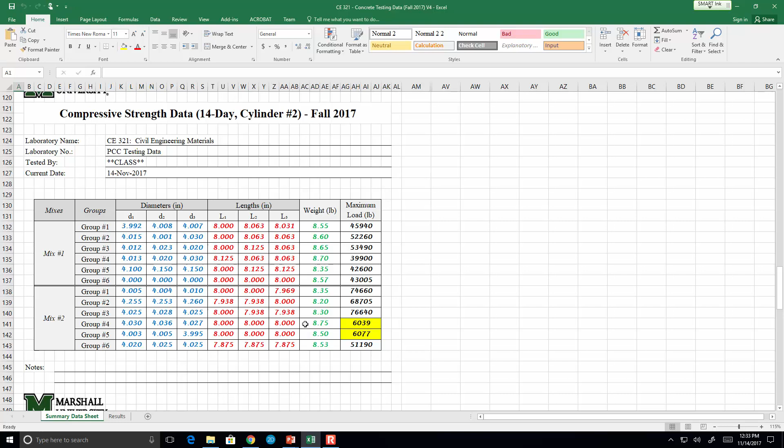This is the Excel sheet, and if we look here on 14-day mix 2, I don't think those are right. We checked it. We checked it, I think that's right. All right, group 4, was it 6039? Hold on, probably. Do you have your data sheets, group 4? There's enough of you in here that one of you should have your data sheets. This is 14-day, mix 2, cylinder number 2. So this is 6077, and this is 6039. Okay, all right.

No, I know he did. I wasn't testing him, I was testing everybody else who said, 'Oh yeah, we checked it, we checked it.' I know he checked it. I was calling everybody else out on it, that's what I was doing. So I at least got groups 4 and 5.

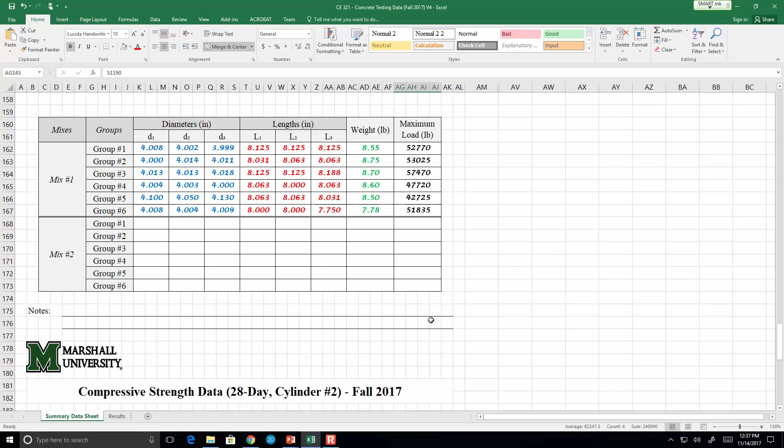And you all know, the big thing to pay attention to is that rubric. There's a rubric posted online, and that's literally how I'm going to grade the report. So you need to be paying attention to that rubric and ensure all of the information it's asking for is included. I'll pull it up to make sure everybody's on the same page.

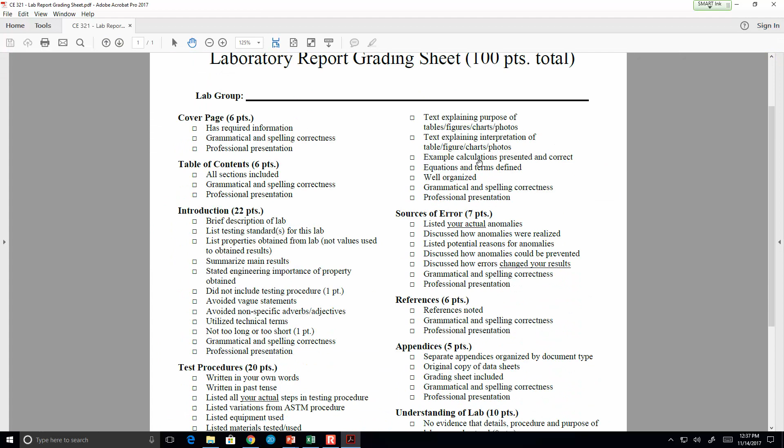So this is the rubric, and this is what I'm going to do. Cover page, 6 points. Table of contents, 6 points. Introduction, test procedures, conclusion, sources of error.

Oh goodness, go away. Yeah, we haven't had the Java pop-up yet. Give it time, it will.

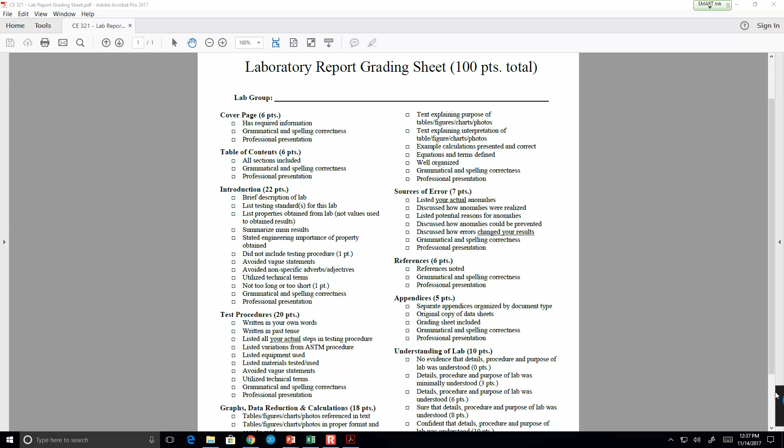Graph. I love this computer. Graphs, data reduction and calculation, sources of error, references, appendices, the understanding of the lab.

This isn't a section of the report, by the way. This is me evaluating whether or not you understood the lab. I know there's going to be one group that says understanding of lab, it's like no, that's not what that is. So yeah, this one is me giving my assessment of your lab report. That's what this is.

So make sure you're following this. All right, any questions? Okay, so let's go into lecture.

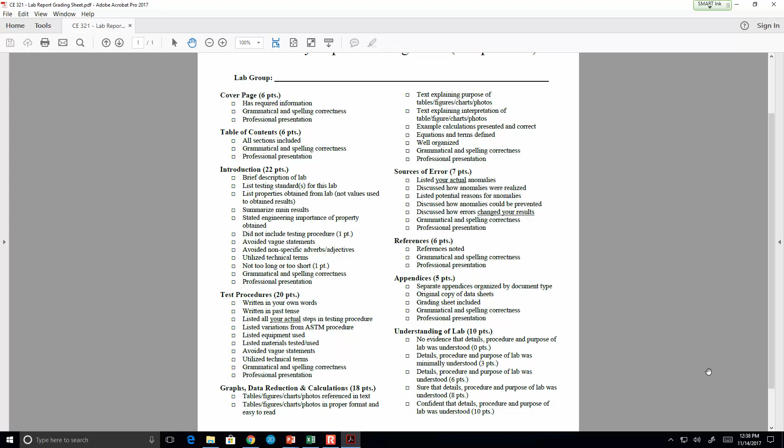I've got 2 real topics I want to talk about today: aluminum and timber. Aluminum is going to be real quick, there's really not a lot to say. The notes and everything are posted, I got those posted today. I usually like to post them a little earlier, but I've had a busy week. But there's really not a lot to say about aluminum, and here's why.

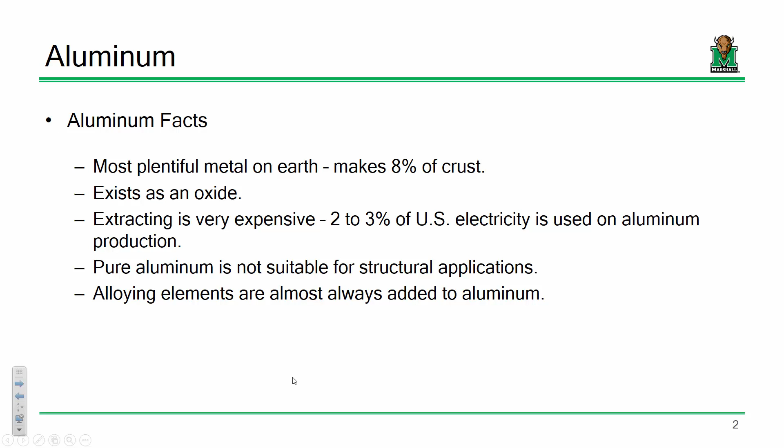Everybody here knows how abundant aluminum is on the planet, and it's used for quite a lot of engineering applications. But one of the things you'll find is that it's not used very much for many civil engineering applications. You don't really see very many aluminum bridges or aluminum building frames. You see aluminum Coke cans and aluminum products used in mechanical engineering in cars and planes, but you really don't see it much in civil engineering. There's a very specific reason why, but we'll get into that.

First off, it's expensive in comparison to other materials. It also has some very interesting aspects: first off, lower strength. If you just look at yield strength and tensile strength of aluminum and compare that against regular mild carbon steel, it doesn't hold a candle to it. Also, in terms of ductility, steel has a much higher ability to withstand permanent deformations than aluminum does.

One other aspect of this is the coefficient of thermal expansion. We'll bring up a little mechanics of deformable bodies for you all that love that class so much. When we apply mechanical stresses to a system, it responds by deforming. I take an element, physically yank on it, and it will deform. What is another easy way I can cause deformation on a given system? I can heat it up or cool it down, right? When things heat up, they tend to expand; when things cool down, they tend to contract. In solid mechanics, we relate that through a coefficient of thermal expansion.

Each material has its own Young's modulus and its own Poisson's ratio, and the coefficient of thermal expansion is another intrinsic property unique to a given material. For instance, if you want to determine the change in length of a bar that's been heated up some amount, you take the length of that bar, multiply it by the change in temperature, and then multiply that by your coefficient of thermal expansion, alpha. I know you saw that in deformables. So alpha is a property unique to a given material - the alpha value for steel is different than for aluminum or for brass. Aluminum has a coefficient of thermal expansion that's about twice that of steel.

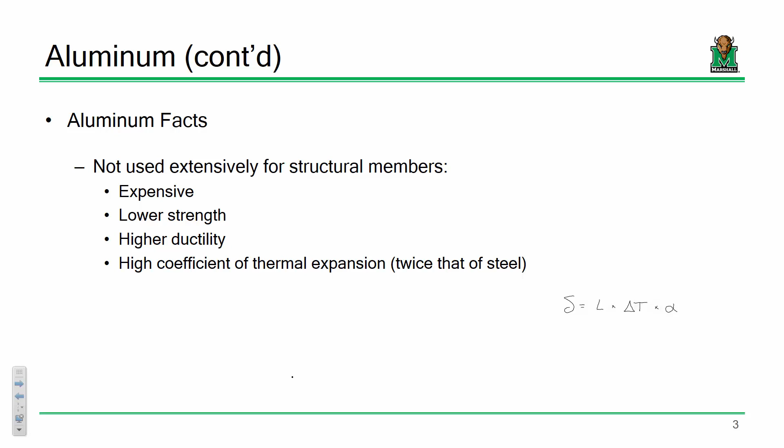If you take a piece of steel and sit it outside, you're going to get twice as much strain essentially in the aluminum that you will in the steel under the same thermal conditions. That's a big deal since a lot of our civil engineering structures are outside. So that's one reason why we really don't use aluminum that much.

But we do use it a lot for other industries. You'll use it for containers and packaging, Coke cans, and what have you. You do use it for aspects in engineering that aren't very load-bearing, like architectural aspects - doors, windows, and siding. Nothing wrong with that being aluminum because they're not really experiencing a significant force effect. That's no big deal. Sometimes they're used as electrical conductors, and you also see it used quite heavily in aircraft, vehicles, and things like that.

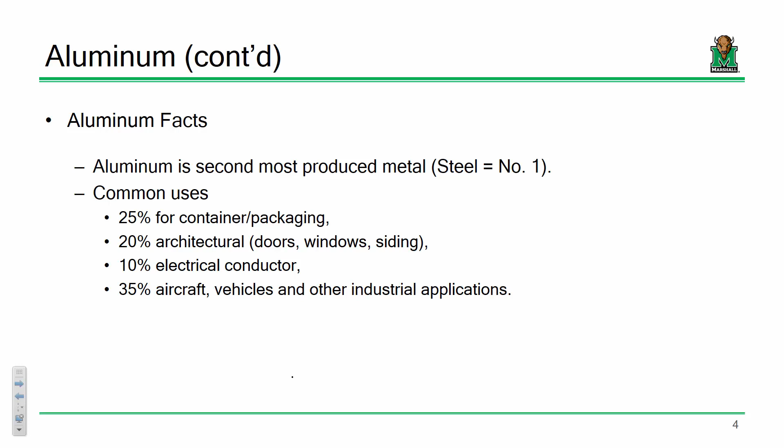Now, it does have some advantages. It's light, it has a good strength-to-weight ratio - you got to give it that. It's got good properties, good weldability properties. It doesn't really rust. There's a little bit of corrosion that can happen with aluminum, but not to the degree that you get with steel. So that's kind of nice. It works well for cast products as well because of its melting point. It's a little easy to deal with.

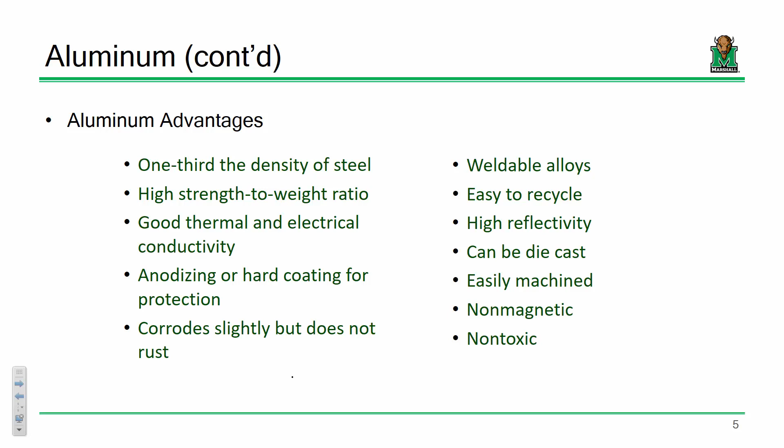Its disadvantage, the big one, is its modulus of elasticity. It is about 1/3 that of steel. So if I take a steel product and an aluminum product, exact same dimensions, exact same properties, except one's made of steel and one's made of aluminum, and I apply a tensile load to it - say I take a steel bar and an aluminum bar and yank on it, assuming they have the same dimensions and the same forces - the aluminum bar's deformation will be 3 times that of the steel. That's a big deal in the world of engineering.

Take highway bridges, for instance. One big controlling aspect of a highway bridge design is limits on its deflections. A common limit in highway bridge design is L/800. So if I take the length of a bridge - let's say I have a 100-foot bridge, simply supported - take 100, divide it by 800, and then multiply it by 12 because I want my answer in inches.

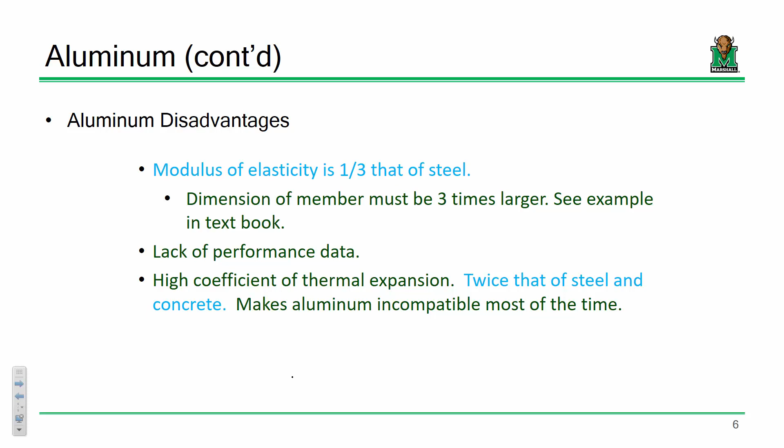Under live load - and by live load I mean the vehicles, the HL93 AASHTO design truck, you folks in structural analysis should know what I'm talking about - under that vehicular load, a 100-foot bridge in the United States cannot deflect more than 1.5 inches. So a material's ability to withstand those deformations is really important. It's one of the reasons why aluminum doesn't really work that well. If you look at tensile properties, if you compute the slope of that linear portion, it's going to be about 1/3 of that of steel. The modulus of elasticity is about 10 million psi for aluminum. What's the modulus of elasticity for steel? Well, 29,000 ksi - 29 million psi. Okay, so that's where we're getting the 3 times that.

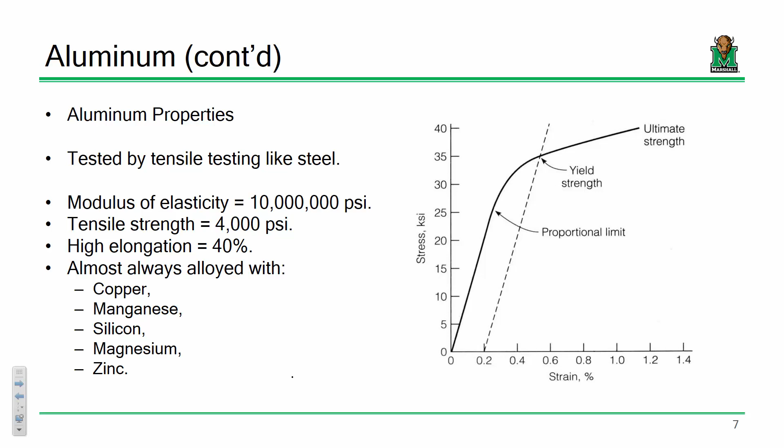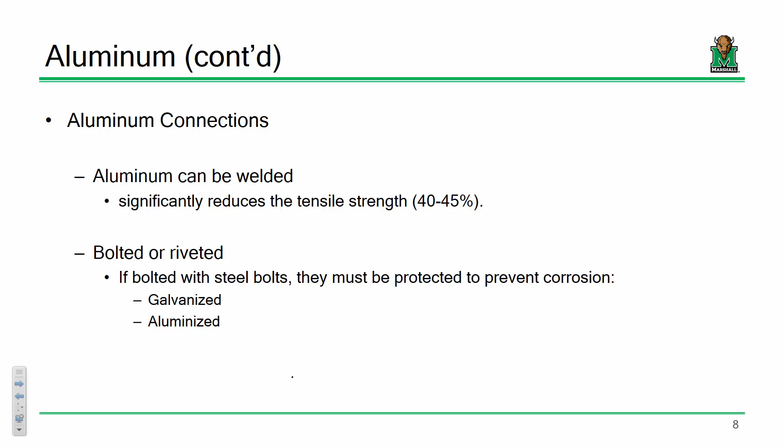Tensile strength, we're looking pretty low. A couple other things with aluminum - because it tends to be used for aircraft type products and things like that, aluminum can be bolted together, but you tend to see more riveting applications with aluminum than you would with steel. You have to protect those elements against corrosion, so sometimes you have to galvanize them or aluminize them or what have you, just to ensure that you don't get significant corrosion.

Speaking of corrosion, aluminum kind of corrodes - it develops a thin oxidation layer on the outside, and that's about it. It's kind of like an oxide film, and it actually serves as a protection barrier for the rest of the product. Certainly, regular old structural steel doesn't behave that way. Weathering steel kind of does, because the chemistry of that heat of steel is actually designed in order to behave that way.

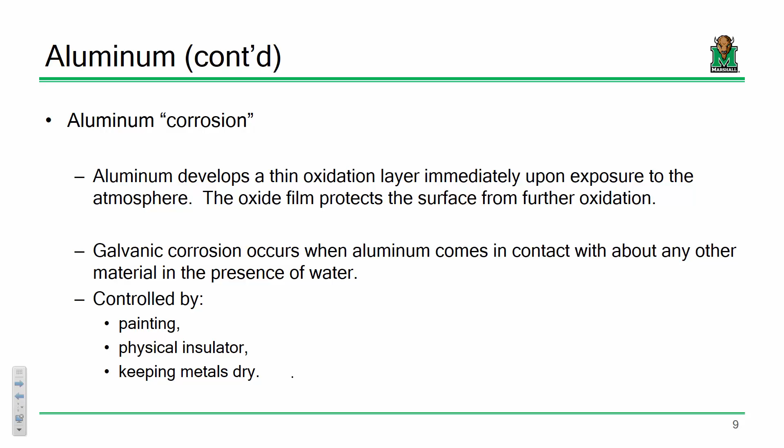One big issue, though, is if you have a significant presence of water, you can get a little bit more corrosion. That means painting it, keeping it dry, providing some sort of insulator, et cetera. That's really all I have on aluminum, because, again, we don't really use it much in civil engineering applications.

Yes? You see aluminum products riveted, especially in the aircraft industry - you see aluminum products riveted a lot more.

It's just an industry standard for - keep in mind, I'm not talking about civil engineering applications. I'm talking about aircrafts and vehicles and things like that. That's a mechanical engineer's world. Remember, mechanical engineers design weapons, we design targets, so. Did you like that? Yes.

Okay, this is recording. I'm glad you whispered that. It doesn't need to have my name associated with it. Next thing you know, I'm going to get a knock on my door, like, we got some questions for you.

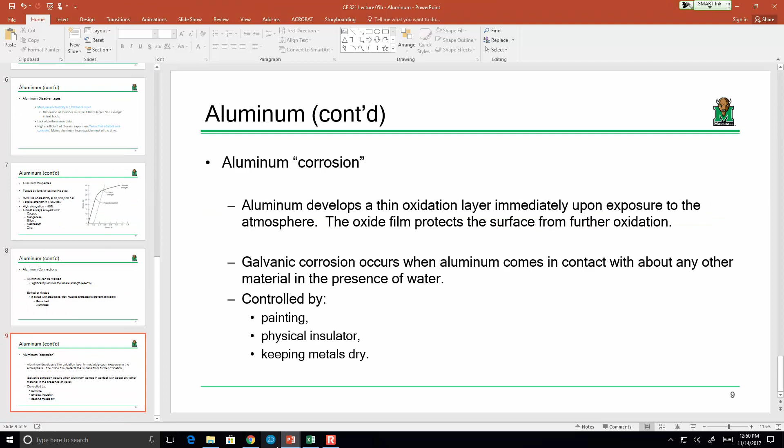Okay, so let's talk a little bit about timber and wood. I'm using a little bit of an older set of notes just because I did not have time to do a little bit of reformatting on this, but it doesn't matter, these are great notes. So let's talk a little bit about wood, let's talk a little bit about timber.

Wood is the earliest construction material we ever used, right? Historically, I mean, the first construction project in history: have a river, there's a tree, knock the tree down, it goes over the river, you have a bridge. First construction project ever. I'm just going to design all my bridges that way.

What's that? A what? You know that if you go to MIT, the mascot is the beaver, because they're nature's engineer? I'm serious, I'm not making that up. Hey, I went to Bluefield High School, you know who the mascot for Bluefield High School was? The Beavers. So I take exception to that, thank you. What's that? I said, did you all have a lot of engineering at your high school too? No. It's not as clever then. No, it's not, not even close. I totally agree with you.

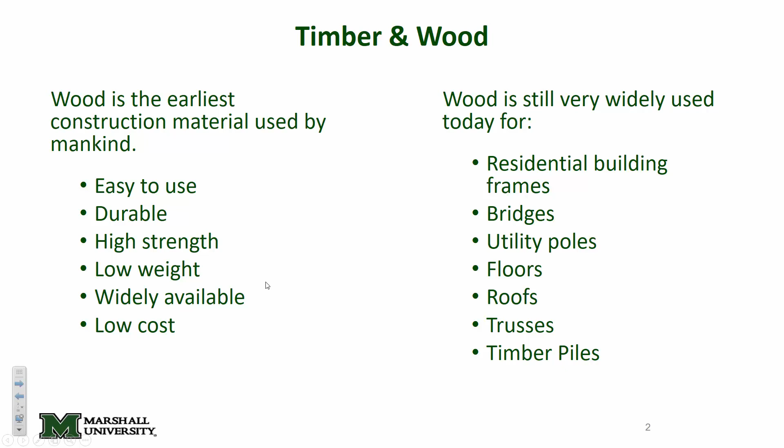Now, wood is obviously used a whole lot in the residential market, right? 2x4s comprise the primary construction material we use in residential construction. 2x4s, 16 inches on center, that frames up your walls that will ultimately frame up your house. So an understanding of how wood behaves and how timber products are produced, and the different timber products out there, is worth discussing.

Now let's talk a little bit, let's just go back to basics. It might feel a little bit like we're in 7th grade when we're talking about some of this. So some of these terms you might be familiar with, some not. How many of you have heard the difference between a deciduous tree and a coniferous tree? Anybody know what I mean? So help me out, what's the difference? There we go.

Deciduous trees lose their leaves. Coniferous trees are pine trees, evergreens that essentially don't lose their leaves. They retain their color throughout the year.

How many of you have heard of the terms endogenous versus exogenous when it comes to trees? In most engineering applications we use exogenous trees, and that's talking about the way trees grow. Up until now, how did you think trees grow? Annually, forming rings, right? That's what an exogenous tree essentially means. That's what most trees are, and those are the trees we use for most engineering applications. They grow on an annual basis, they form annual rings, and they grow from the inside out.

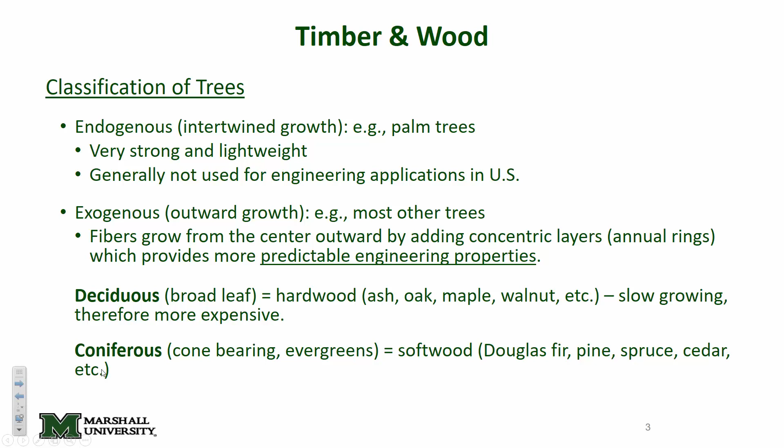Endogenous trees don't really grow like that. The fibers don't grow in an outward direction as much as they kind of intertwine and develop along the tree. You get very strong and lightweight properties, but they're a little variable and don't work very well for engineering applications. A good example of an endogenous tree is a palm tree. Palm trees really don't grow like that, they kind of do this whole thing - I can't really demonstrate it.

Let's talk a little bit about the structure of wood. I'm sure everybody knows you can determine the age of a tree. If you have it sawn, if you're looking at the stump, you can count the age of the tree by counting the number of rings. So if it's got 57 rings, it's a 57-year-old tree.

Just so everybody's aware, what comprises a ring - if you look at the rings of a tree, you see light regions and dark regions. It's not as if that's really different wood per se, but it's more of a density difference in the individual cells of your wood. If you look at your rings, you have a lighter grained wood and a darker grained wood. Those darker grains correspond to the denser regions of thick-walled cells within your tree.

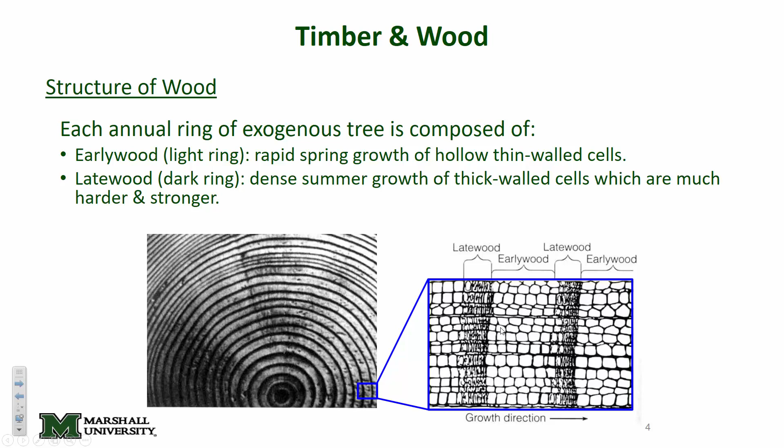Early wood is your rapid growth right after winter. As soon as winter ends and you get into spring, you get a sudden bloom of growth. Once you get into summer and it starts to get warmer and then cool down, that growth tends to slow down, and then you develop late wood. In those slower growth periods, the growth occurs over a denser region, which is why you have a denser collection of cells.

Some structural features of trees so you understand a little about the anatomy of a tree - I'm starting at the center and working my way outwards. I have a feeling probably in middle school or high school you learned these terms before, like how many have heard of the pith of a tree, the center core of a tree? A lot of you have probably seen this before.

The heartwood is right outside where the pith is, and then you get your sapwood. The sapwood is really what transmits the sap throughout the remainder of the tree. You have a very thin cambium layer, which is really where all your wood growth occurs - it grows from the outside, so the cambium is where the wood is growing. Then you get into your bark, your inner and outer bark. Your outer bark is essentially that dead, corky type layer that exists on the outside and insulates the rest of the tree.

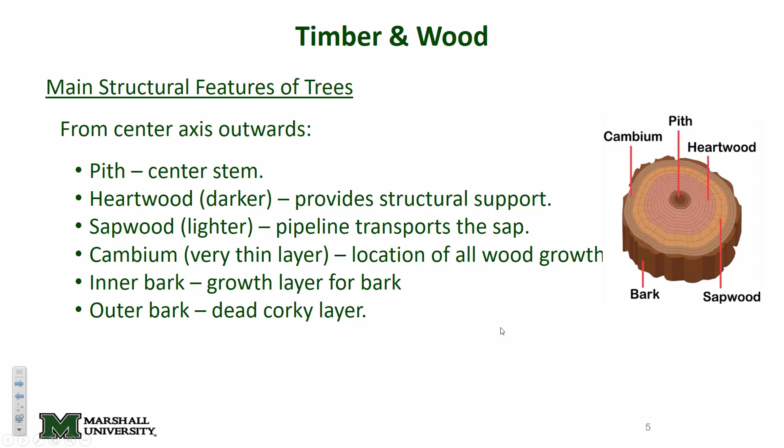Now I'm going to throw some words at you - some words I'm pretty sure you haven't heard before. How many of you have heard of the term isotropic? Now how many of you know what that term means as it relates to engineering or engineering materials?

Let me explain. Let's say I have a little cube of steel, 3 inches by 3 inches by 3 inches. And I take that cube of steel and I press on it, so I'm putting it in compression. Steel tends to behave very isotropically.

We tend to assume that steel is an isotropic material. The reason why is it really doesn't matter if that cube is faced this way, this way, or this way. Steel, from a material standpoint, the properties really don't change with the orientation of my load. Does that make sense?

Now, don't get me wrong. I don't want you to confuse that with just general structural behavior. For instance, if I have a W10 by 49, which weighs how many pounds per foot? How deep is a W10 by 49?

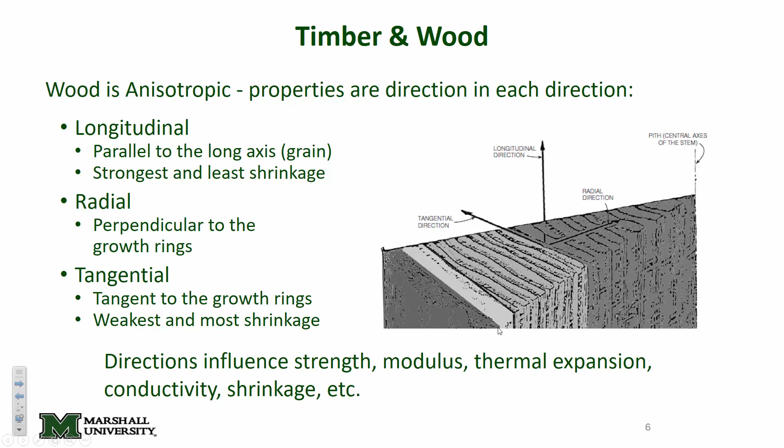Okay, let's move on. One of the things that really affects wood properties... no, I mean seriously, oh that's a good question. Oh yeah, no that's a good question. I was like, well wait, where have you been? No, I'll say this.

Concrete is a material that behaves very differently in compression than it does in tension, and we understand that. However, if I have a cube of concrete and I load it this way versus turning it and loading it this way, or turning it and loading it this way, honestly its behavior really isn't going to be that much different. Now, let me also say this - here's one big difference between characterizing a material like steel and characterizing a material like concrete.

Steel we can tend to assume is a very homogeneous mixture. What I mean by that is steel's consistency, for the most part, tends to be the same throughout its cross section. So if I had a cube of steel, it's basically the same properties here as it is here, as it is here, as it is here, etc.

Concrete is a very heterogeneous material. In other words, it's a mixture of gravel, sand, cement, and water, so its properties are highly variable. Concrete properties here might be different than they are here. You've all even seen that in the lab, right? If you didn't properly rod it or tamp it, give it the old tap on the side, just tap it in - if you didn't do that, you can create a weak spot.

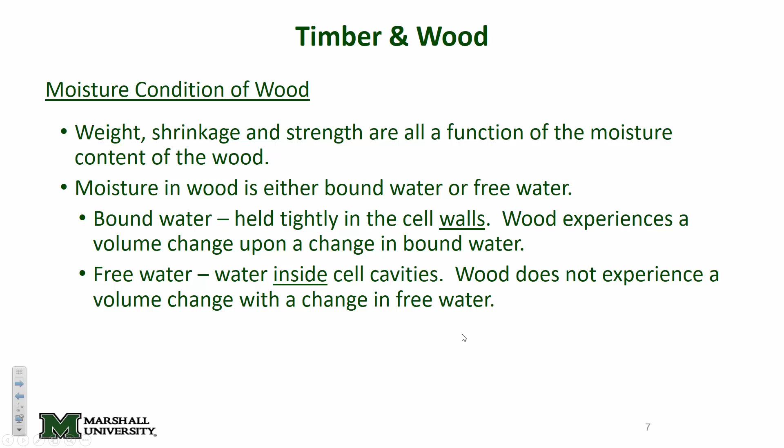So if you want to think of it like this, imagine a piece of wood as a whole bunch of really, really tiny balloons. Bound water is water inside the balloon, and free water is what's on the outside. Water inside the balloon is going to cause it to expand. Water on the outside really isn't going to do anything, just make it heavier. Make sense?

So just so you're aware, what is the fiber saturation point? The fiber saturation point is a lot like absorption associated with aggregates. Let's remember, what was absorption associated with aggregates? Who remembers that? Absorption was the moisture content at what state? Saturated surface dry. Now, what is saturated surface dry? Dry to the touch - the pores are full, but the surface is dry, right? So that's what saturated surface dry is, and that's kind of what's going on with the fiber saturation point.

That's a specific moisture condition associated with a piece of wood. The idea is that the cells are completely saturated with bound water, but there's really no free water inside the cell cavities. And that varies from a given species of wood to another species of wood.

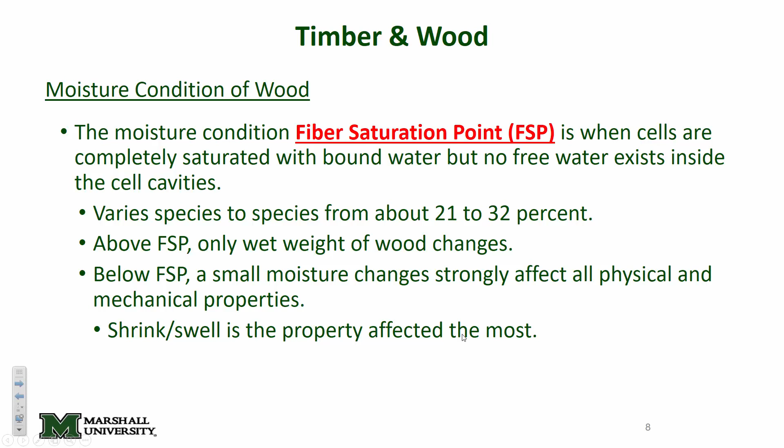So whether you're dealing with Georgia pine or Douglas fir, something around 21% to 32% is the fiber saturation point. When you get above that point, all that's changing is really the weight of the wood, you're just adding water that makes it heavier. Below the fiber saturation point, we're talking about change in moisture content, and that means shrinking or swelling of the wood, which really tends to change mechanical properties.

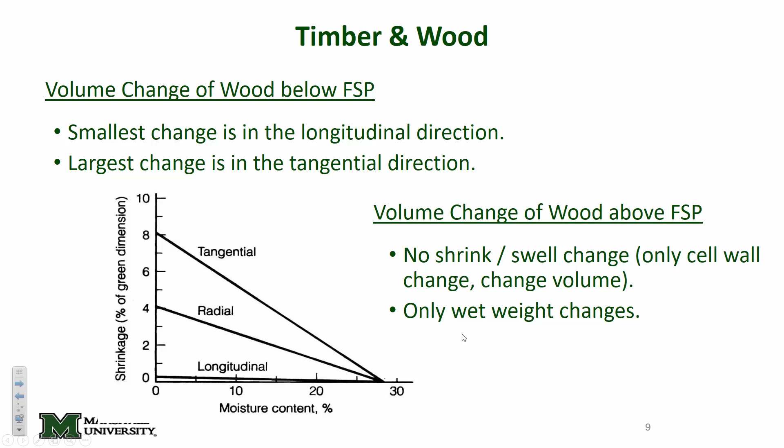As your moisture content goes up, your shrinkage can change as well. One other thing to mention: when moisture content changes below the fiber saturation point, the volume changes, but the smallest change is in the longitudinal direction and the largest change is in the tangential direction. So the wood isn't getting longer as much as it's getting wider. That's what's happening inside a piece of wood when moisture content changes, below the fiber saturation point.

Another moisture content measure that is very important for engineering applications is equilibrium moisture content. That's basically what's happening when the moisture content inside the wood matches the ambient moisture content according to atmospheric conditions in a given region. So given the moisture content in our average atmospheric conditions, EMC is when the moisture content reaches equilibrium with naturally occurring conditions in the area. It depends on humidity and temperature.

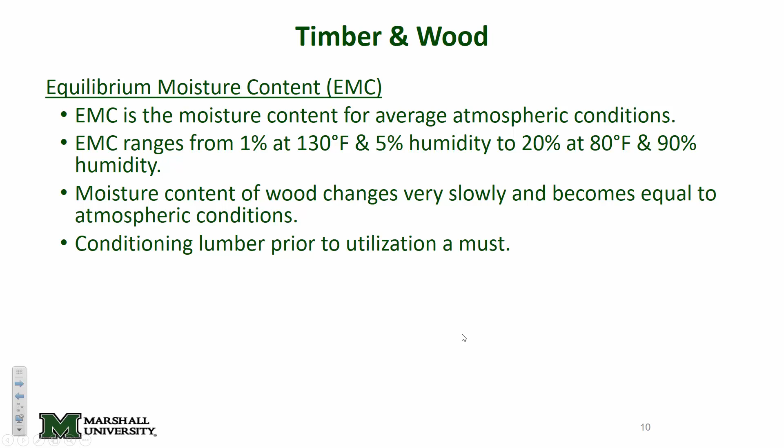One thing about moisture content of wood is that it does change, but very slowly. Ultimately, over time it ends up matching local conditions and reaching EMC. You kind of have to condition lumber prior to utilization. We'll talk about some of this throughout the lecture, and we'll talk about production of lumber pretty soon.

Okay, so let's talk about some engineering applications of wood, different products. I assume everybody has heard of a 2x4. What are the dimensions of a 2x4? So somebody knows that a 2x4 is not actually 2 inches by 4 inches. Those are nominal dimensions - we plane that 2x4 a little bit in order to achieve those exact dimensions.

Dimensional lumber is defined as anything between 2 inches and 5 inches thick, so 2x4s, 2x6s, 2x12s, 4x4s, etc. That's used for light framing, and it owns the world in residential construction - you see those all over the place. Heavy timber are 6x6s, 8x8s, etc., and those are usually pretty rough, so when you see a 6x6, it really is 6x6, or an 8x8 really is an 8x8. You'll see those for heavy framing.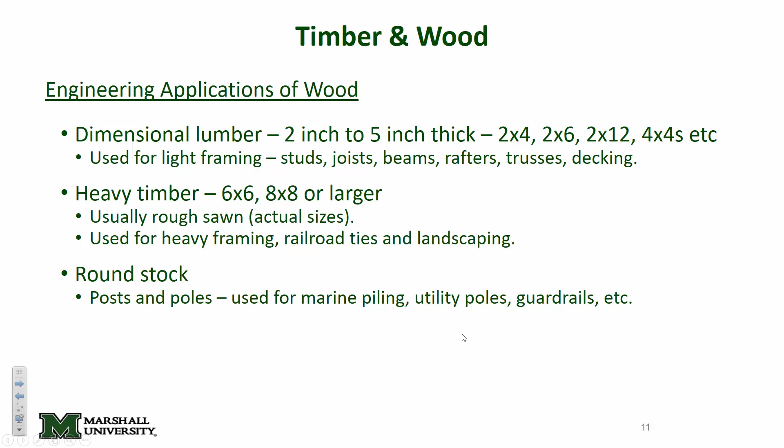A big application of heavy timber is railroad ties - if you've ever seen one, it's huge, and that's what we're talking about. You can also see it in landscaping applications - if you have a slope and want to pull that back a bit, you can use it to create a mini wall to retain that. Timber also tends to be available in round stock, and I'd argue the most common application of round stock is utility poles, telephone poles, things like that.

I'm sure you all have seen your fair share of applications of wood. I don't think there's anything in this that is very earth-shattering.

There's a company in Portland that's designing decent-sized skyscrapers out of wood now.

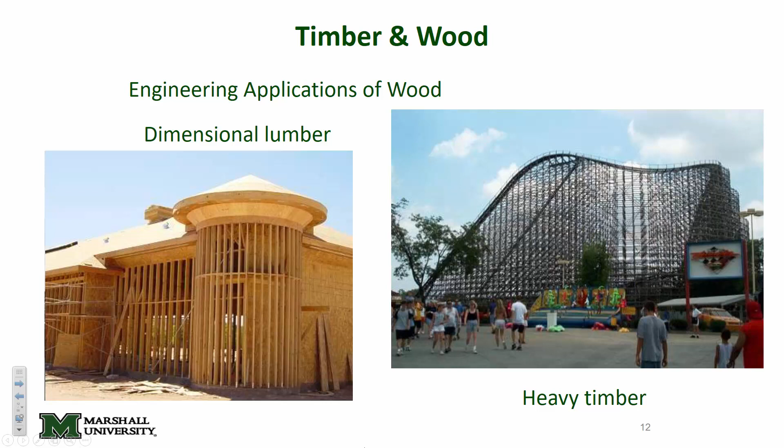Now that you're mentioning that, I'm going to pull up a video here in a little bit, you'll like this. I'll pull it up later. I'm going to show you a video of the largest earthquake test ever performed on a timber structure - it's big. They did a scale model, it was like 7 stories tall. You know what, we're just going to do it now. This is probably going to have some copyright stuff on it, so I'm just going to pause the recording. We're back, okay.

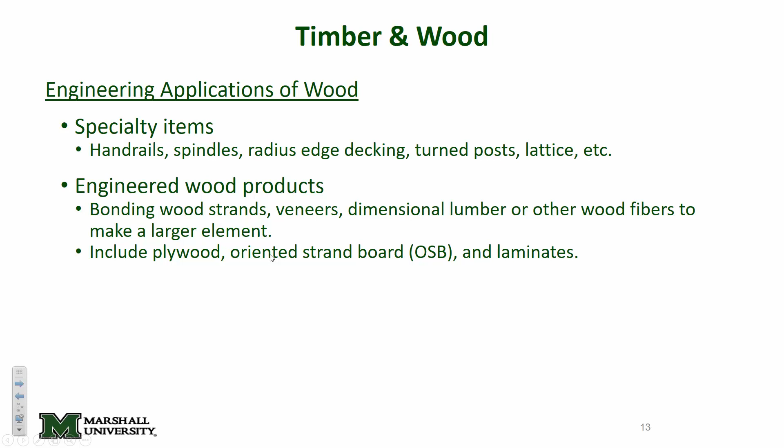Now, I'm curious, how many of you have ever heard of a Glulam Beam? What's a Glulam Beam? Laminated, basically. Glulam stands for glued laminated beam.

A laminated beam consists of basically taking different species of wood and layering them into a girder to resist loads. Let's say we're talking about this arch bridge over here. Here's a pop quiz for you. If you were the designer of this bridge, and you had really good, strong species of wood, and then you had not so good, kind of weak, crappy species of wood,

would you take your crappy wood and put it in the middle of that beam or the ends of that beam? Who says middle? Who says ends?

It's the middle. No, here's what I'm getting at. Let's say you have some girder comprised of layering different strips of wood and pressing them together to create a laminated beam. Mechanics of materials says your bending stresses get larger on the ends than they do in the middle. So use your really good species of wood at the ends.

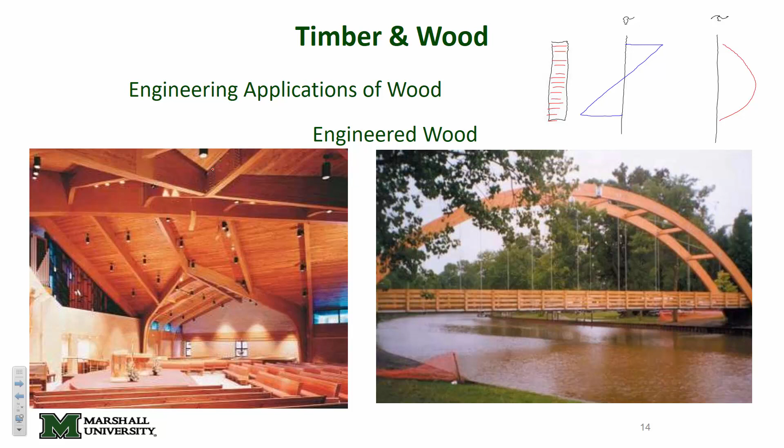So yeah, everybody good? All right. I'm going to pause the video again because I'm going to pull up another video. I want to talk about - I love How It's Made, it's an awesome show. If you're an engineer, have you watched How It's Made? Good. You will be.

All right, so I want to talk about the production of wood products and how timber is produced. Oh, I closed it. Okay, so hold on.

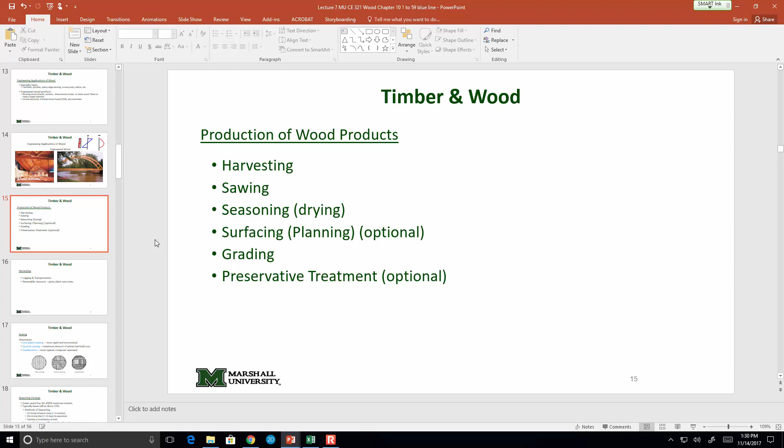So the question was, why would you sort them by their size if they're all the same size? You all just saw a short clip on the production process from start to finish. What I sort of want to harp on a little bit is this - what was really done in that video was really looking at combination sawing.

If we're talking about sawing a piece of wood, there's three different main ways of doing it. One of them is plain sawing - you literally just take the piece of lumber and saw it in lengths to get lumber products that way. That's fine. Quarter sawing is a little more efficient - you maximize the amount of vertical cuts - but really what's done nowadays is a combination cut.

What you saw in the video was the first thing done - the operator was trying to get as many 4x12s as they could out of the log. Then they'd take those 4x12s and cut them into maybe 2x12s or 2x6s or 2x4s. If you were to take a snapshot of the log and superimpose what they were doing to it, it probably looks something like this when it was all said and done - because the idea is, let's take this log and get the most product that we can out of that individual species of log. Does that make sense?

So it might have started out by trying to get as many 4x12s as they could, but then they took those 4x12s and turned them into 2x12s or 2x6s, and so on and so forth. So ultimately, this was what happened to that log when it was all said and done. Does that make sense? That's a good question.

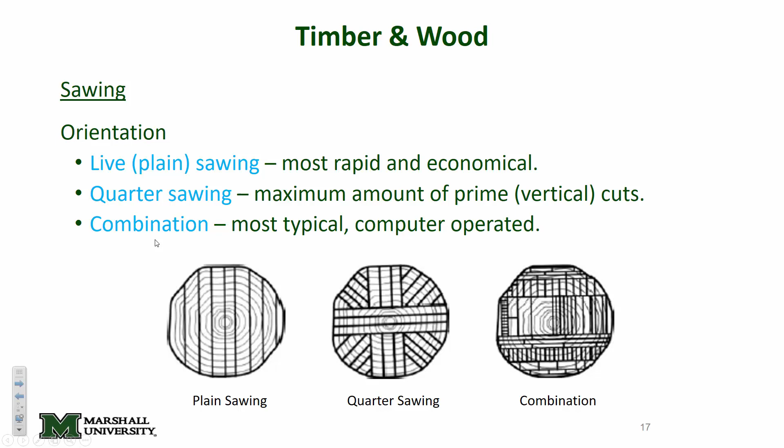What's that? There's a whole different episode for that. So if you ever hear the term seasoning when it comes to wood, that does not mean the addition of paprika — seasoning salt, a shake of cayenne.

If you ever hear the term seasoning, that's basically what that means — we're talking about drying. We can air dry or kiln dry; it just depends on what's more appropriate for a given production. Air drying's cheap, but it's slow — it takes longer. Kiln drying is fast, but it's expensive. Usually there's a little bit of both. The idea is to get the most cost-effective solution that you can.

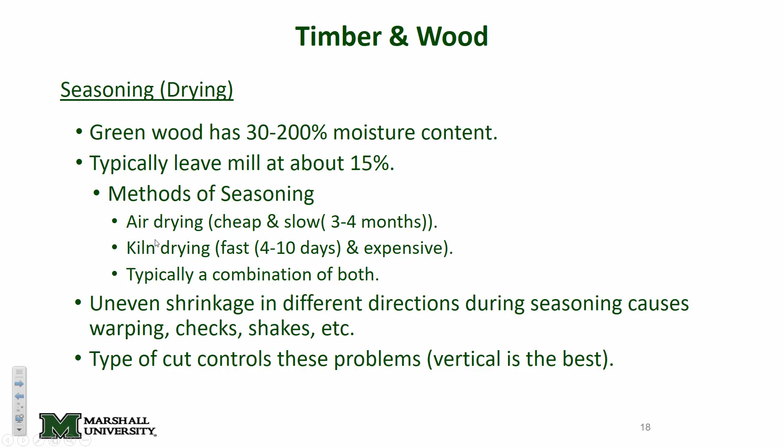One of the things we definitely have to assess is various defects that can happen in wood. This is a big one. Let's talk about a given product: say I've got a log here, I cut out a given piece, and then I dry it. What are you doing by drying? You're removing moisture from the product, right? What is the removal of moisture going to do to the product? It's going to shrink it, right? That's going to happen.

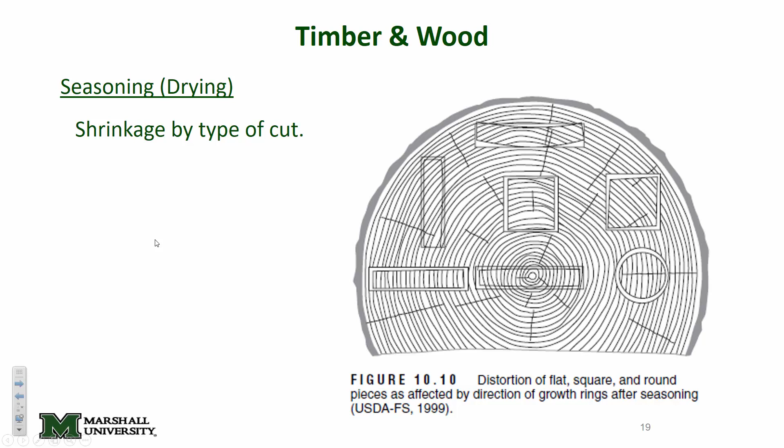So what about this image up top? It sort of bowed a little bit, right? That's a defect — a change in the shape that we have to assess. Does that defect fall within tolerances, et cetera? This is just to give you an idea that stuff like that can happen. That's a distortion we would have to assess.

Yes — that is true. Vertical cuts tend to be the best; you tend to get more prime cuts from vertical pieces. Those horizontal pieces, yeah, you do have a tendency to get more distortion. But it's also a function of cost. If you're maximizing the efficiency of a given log, you're probably going to have some good cuts and some bad cuts. But it also depends on what you're using them for, you see what I mean?

One of the ways that we can account for some of this is through surfacing. You all know that a 2x4 is not 2 inches by 4 inches because we surface that to its final dimensions. Surfacing takes off 1/4 of an inch for each side that's less than 8 inches originally, and if it's over 8 inches, it takes off 3/8 of an inch.

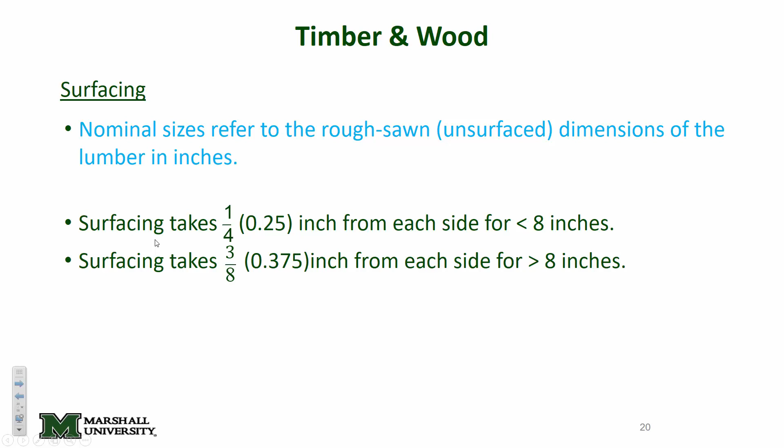Let me explain. If I have a 2x4, it's actually 1.5 inches by 3.5 inches. Given a rough cut piece of 2x4, surfacing will take off 1/4 of an inch from each surface. So if I've got the 2-inch side, take off 1/4 inch and 1/4 inch, that gives me 1.5 inches. If I have the 4-inch long side, take off 1/4 inch and 1/4 inch, gives me 3.5 inches. Now if you have a 4x4, again just take off 1/4 and 1/4.

Now let's say if you got a 2x12. The 2 inches, take off 1/4 and 1/4 to get 1.5 inches. But the 12 inches, we take off 3/8. So 3/8 and 3/8, so I get about 11 1/4. Does that make sense?

Now, for my construction folks in the room, let me ask you this. What time is it? Let me see. Okay, we got this, and then we'll call it. This is a perfect place to stop.

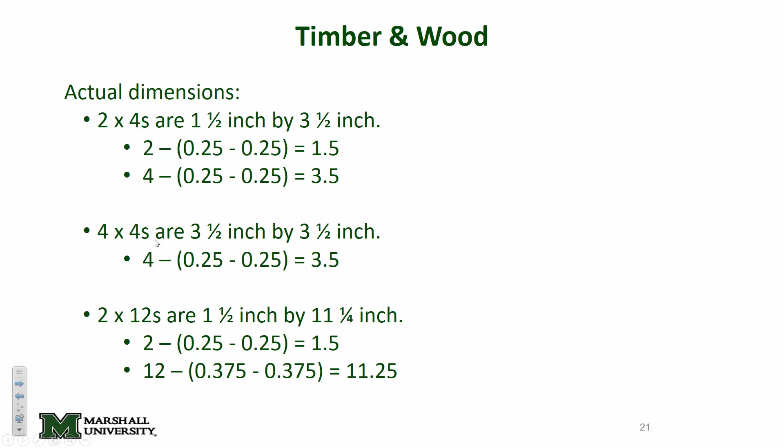So my construction folks in the room, if you got different pieces of lumber on a given project, 2x4s, 2x6s, 4x4s, etc., what is a common way of performing estimation on the amount of lumber on a project? What's a common unit? Board feet. How many of you heard the term board feet? That's what a board foot is. A board foot is a way of lumping your lumber product into a single unit of estimation.

Let's talk a little bit about board feet. Board feet are computed based on rough cut dimensions. So if it's a 2x4, we actually use the 2x4, we don't use the 1.5. A board foot is basically a measure of a volume of wood. So if I have a given project, the idea is how do I estimate how much wood I'm using on the entire project? We estimate that in board feet. It's just a standard unit of measure.

If we're doing concrete, we measure concrete typically by cubic yards, right? How many yards of concrete on this given project? How many board feet of wood on this given project? Now, a board foot is a 1-inch thick piece of wood that is 12 inches by 12 inches. So 1 square foot that's 1 inch thick, that is a board foot. You might hear the term FBM, foot board measure, or the term board feet. I've always used board feet.

The easiest way to determine board feet is to compute your volume in cubic inches, then divide by 144, because 1 foot and 1 foot. That'll tell you how many board feet are present on a given project.

So here's a simple example for you. How many board feet, watch this. Let's say for 30 2x4s that are 8 feet long, you want to calculate how many board feet are present. It's really simple. We take 2 inches times 4 inches times 96 inches, there's 30 of them, divide by 144. What do we get? 160. That's 160 board feet. Is that hard? That's simple, right? Everybody okay with that?